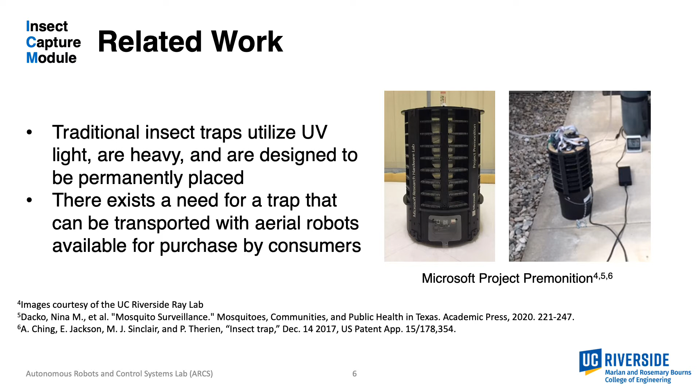In our review of existing technologies, several insect traps exist that utilize ultraviolet light or other insect attractants, such as odorous food and baits, to attract and capture insects. Some drawbacks of these devices are that they tend to be heavy and designed to be permanently placed, such as the mosquito traps used in Microsoft's Project Premonition. We are motivated to design a trap that serves as a means for capturing, retaining, and keeping insects alive during aerial transport, and preferably a trap that can be transported with aerial robots available for purchase by the average consumer.

Our contribution is the design, fabrication, and testing of a novel automated insect capture module, or ICM for short. The ICM is small, lightweight, and low cost. These characteristics enable the trap to get airborne via an aerial robot.

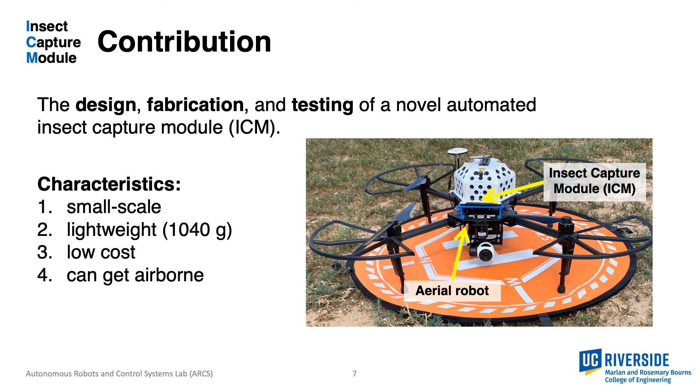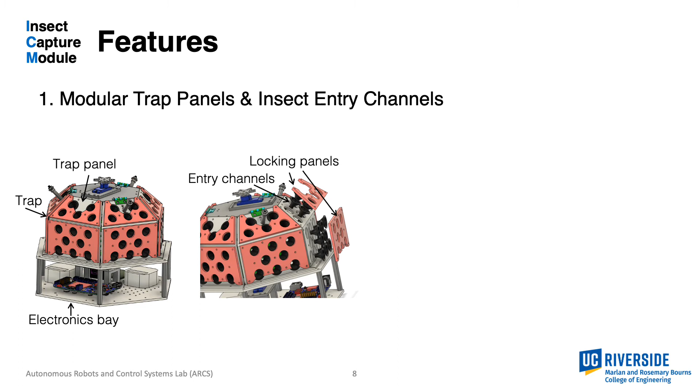Our main objective in the design of this trap is to engineer a structure that can capture, retain, and keep insects alive during airborne transportation. Our design features modular trap panels and insect entry channels. The ICM consists of the actual trap, shown in red, and the electronic space shown below. The entry channels can be interchanged to accommodate different insect types. Inside of the ICM is a UV LED core, which can also be easily removed from the bottom of the trap. Lastly, servo motors can be controlled to open the panels for easy access during maintenance.

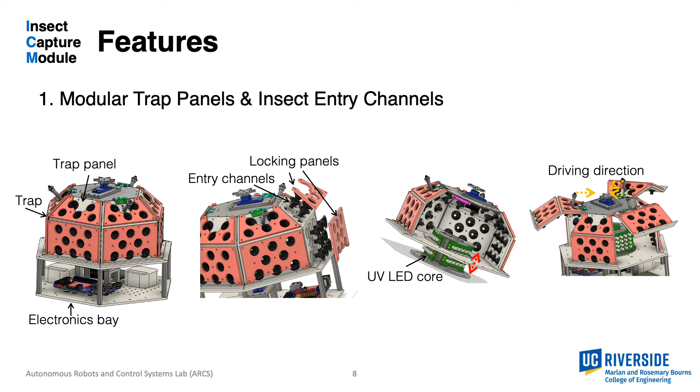One critical design parameter of the ICM is the type of insect attractant used to capture insects in the environment. We selected ultraviolet light as opposed to odorous food and baits, since it is highly controllable and easily configurable. Although behavioral studies and literature suggest that UV light is most attractive to houseflies, we could also utilize the same technology to attract other insects. The ICM features a UV LED core, which can be reconfigured with LEDs of different wavelengths and different LED arrangements.

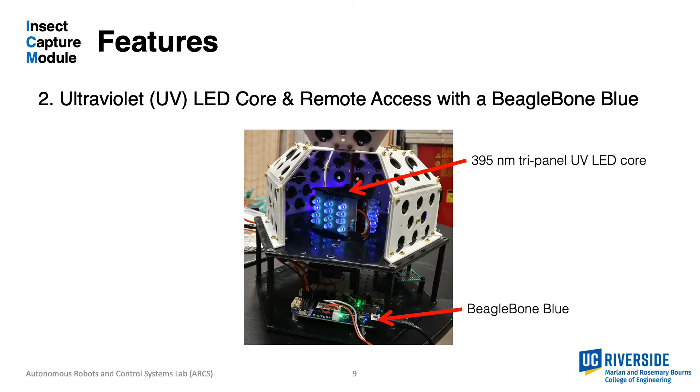The electronics bay also contains a BeagleBone Blue, used to remotely control or flicker the LED core. We place temperature and humidity sensors inside and outside of the trap to monitor environmental conditions during insect capture and transport. A small night vision camera is placed inside the trap to monitor insect activity near the entry channels. With these sensors, we can assess the trap's habitability in different environments.

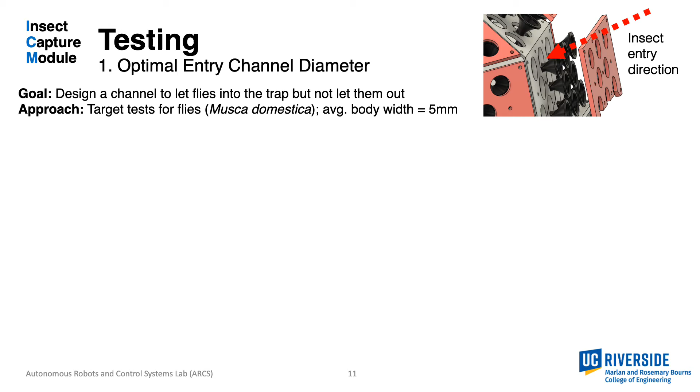We conducted 4 experiments to assess individual components of the ICM and its performance in near real-world testing conditions. For our first experiment, our goal was to determine the optimal entry channel diameter, so that the trap lets flies in but does not let them out. We targeted these tests for flies with an average body width of 5 millimeters.

For the first step in our experimental procedure, we designed entry channels with varying inner diameter from 3 millimeters to 7 millimeters. We performed entrapment and retainment tests with groups of 5 flies, where the goal of the entrapment test was to see how likely the flies were to enter the trap, and the goal of the retainment test was to see how well the trap could keep the flies inside.

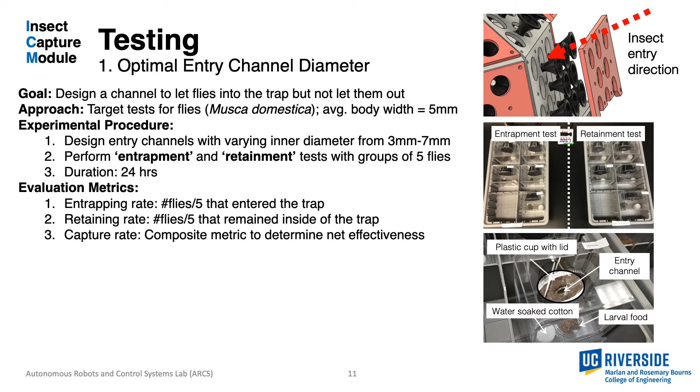To evaluate the performance of the entry channels, we utilize the capture rate, which is the product of the entrapment and retaining rates. We determined that 4 millimeters is the optimal inner entry channel diameter, with a capture rate of 87%.

For our second experiment, we wanted to determine a suitable UV LED core configuration for housefly capture in lighted and dark environments. Literature suggests using UV LEDs with wavelengths between 300 to 400 nanometers, since this is the most attractive to male and female houseflies.

In our experimental procedure, we constructed various LED core configurations. We then placed the ICM and 50 flies into the insect cage. We turned on the UV LED core for 2 hours, after which we counted the number of insects captured inside of the ICM.

Our preliminary results show that the ICM is capable of capturing insects in controlled environments, and this may have been because the UV light is more concentrated in an environment without external influences. Additional data is needed to confirm the ICM's performance in different environments.

For our third experiment, we wanted to assess the performance of the ICM mounted atop the quadcopter during takeoff, flight, and landing. We also wanted to assess the survival, mortality, and escaping of houseflies contained within the ICM during flight.

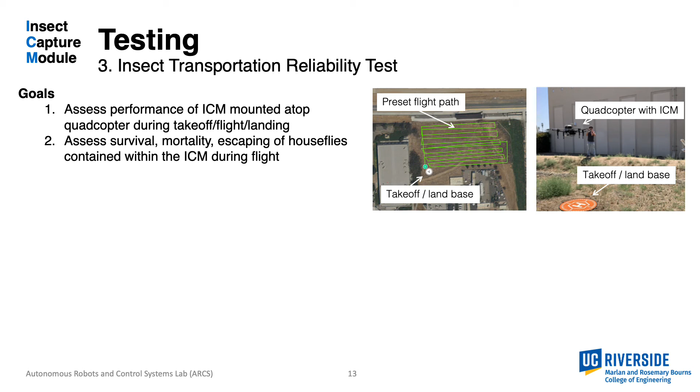For our experimental procedure, 50 flies were inserted into the trap, which was fitted with 4 millimeter channels. After mounting the trap on top of the quadcopter, we commanded the quadcopter to fly at preset paths at 5 meters per second and 2 meters per second for 5 minutes. Once we dismounted the ICM, we counted the number of houseflies that remained alive inside of it.

To evaluate the performance of the trap during flight, we wanted to observe any structural damage and loss of flies. Our results showed that 95% of flies remained alive in the trap after transport, a great indication that flies can survive inside the ICM under turbulent airflow. Moving forward, the ICM also has potential for transporting more flies.

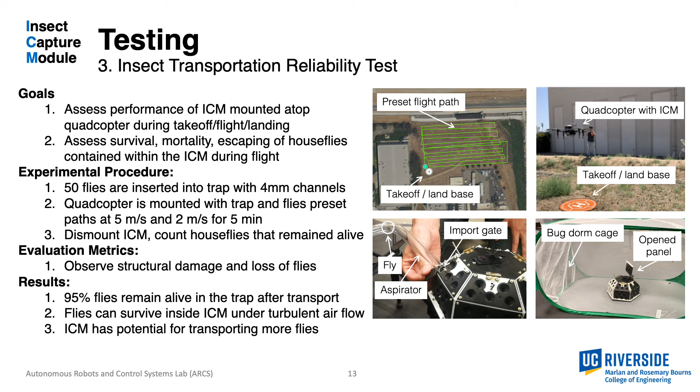For our last experiment, we combined aspects from prior experiments to emulate insect capture and transport in a near real-world environment. These experiments were conducted in a greenhouse lined with tarp to block exterior light. We placed the ICM together with the robot inside the center of the room, and we also placed lures inside the room to emulate external influences.

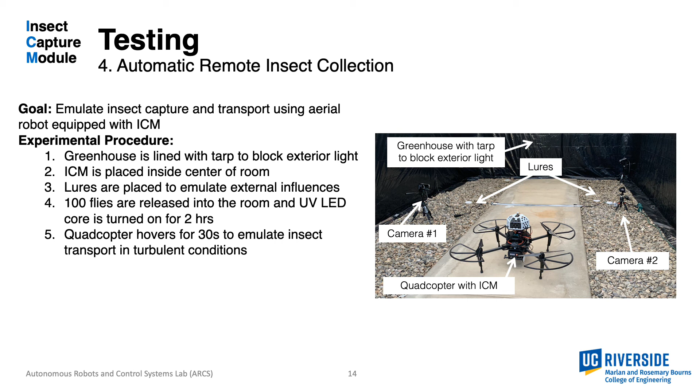After releasing 100 flies into the room, we turned the UV LED core on for 2 hours, after which we commanded the quadcopter to hover for 30 seconds to emulate insect transport in turbulent conditions. At the end of the experiment, we counted the number of flies captured inside the trap and observed insect activity inside and outside of the trap during capture using the sensors mentioned before. Around 5 to 7 flies were captured after 2 trials.

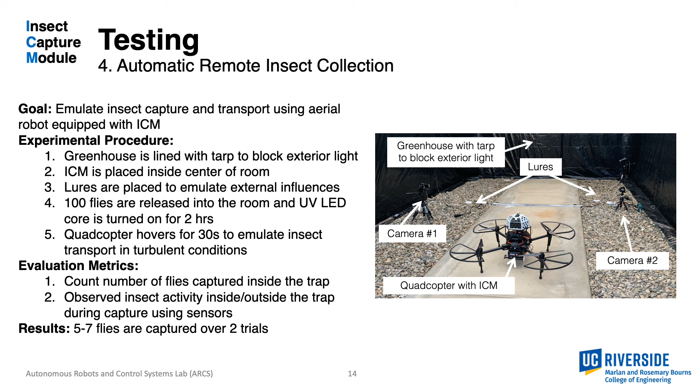To conclude, the ICM captures, retains, and keeps insects alive during aerial transport. This device can be manufactured with typical benchtop tools such as 3D printers and laser cutters. Preliminary results for capturing and retaining houseflies provide an initial indication for developing a general-purpose insect trap.

For our future work, we would like to perform an evaluation of species-specific lures, determine insect survivability under fast flight, and quantify energy efficiency in remote operations.